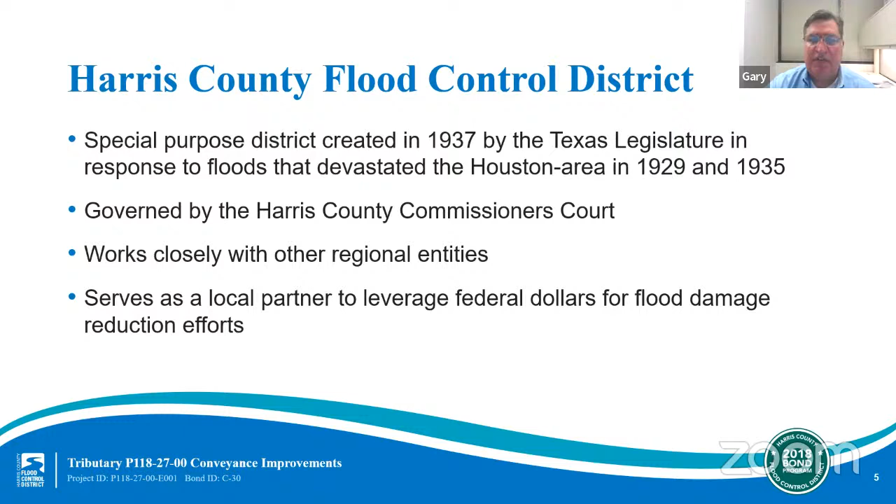The organization was created in part to serve as a local partner to leverage federal funding for flood damage reduction projects. Our mission has expanded since our founding, leading to billions of dollars in federal, state, and locally funded infrastructure improvements in the ground.

The mission of the Harris County Flood Control District is to provide flood damage reduction projects that work with appropriate regard for community and natural values. One of the most difficult challenges we face is constructing effective projects that are sensitive to community and natural values in a highly urbanized area.

Harris County includes 23 main watersheds, totaling approximately 1,800 square miles and more than 2,500 linear miles of channel. 2,500 miles is approximately the distance from New York to California. A watershed is a geographical region of land that drains to a common channel or outlet. Each watershed has its own unique characteristics and needs.

The project we are presenting tonight is in the Halls Bayou watershed located in North Harris County.

Harris County and our surrounding area is flood prone for a number of reasons. Namely, we experience extreme rainfall events, including tropical storms and hurricanes. Our area is largely made up of flat, slow draining land. And we see large concentrations of clay soils that do not soak up excess rainfall quickly.

While the Flood Control District plays a critical role in flood risk reduction, we are one of several entities involved in these efforts in our region. When rain falls on your roof, it flows through several jurisdictions, such as streets and drains, managed by the Harris County Engineering Department, a municipal utility district, or a city, such as the City of Houston, before it flows into a larger channel, creek, or bayou that the Flood Control District owns and maintains.

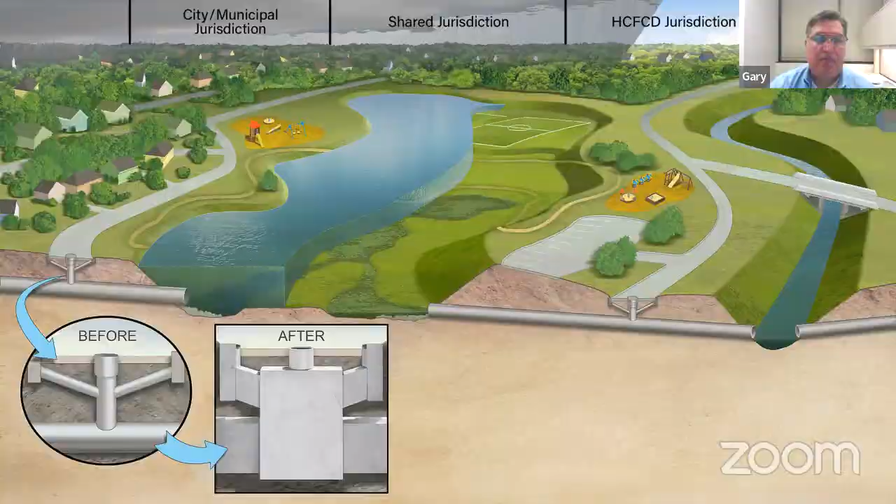On August 25th, 2018, Harris County voters approved $2.5 billion in bonds for flood risk reduction projects. This vote followed a series of 23 meetings with community members across Harris County, one per watershed, which resulted in a list of what is now 181 bond projects.

As of August 25th, 2021, every project included in the 2018 bond program has been initiated, including all of the projects in the Halls Bayou watershed.

A total of more than $1.35 billion in partnership funding has been secured so far to stretch the 2018 bond program even further. The actual timing of each individual project will depend on a variety of factors, including environmental permitting, right-of-way acquisition, and utility relocation, and in some cases, the requirements of a particular grant.

Project lists and projected schedules are updated regularly on our website.

While the bond was for $2.5 billion, the full cost of every project in the bond tables is almost $5 billion. So we made it clear from the outset that we would need funding partners to fully construct the projects in the bond program. We've had some success so far, having secured more than $1.35 billion in partner funds for projects across Harris County.

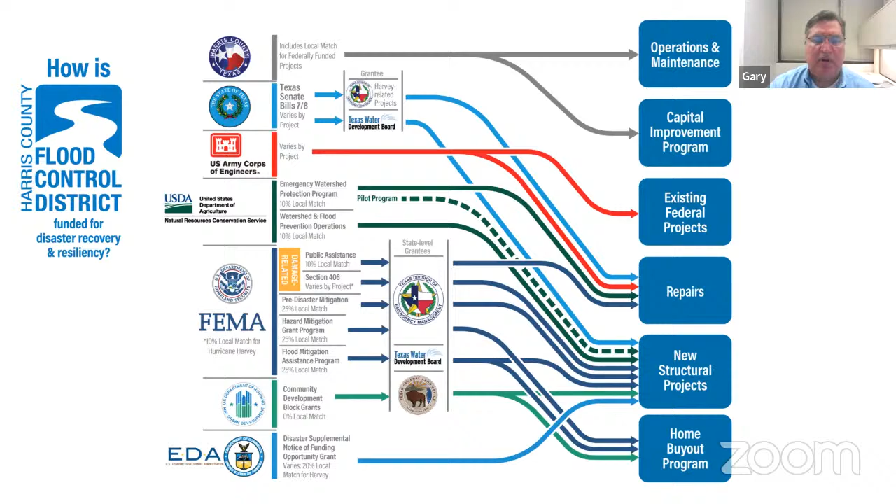We will now move into the part of the program that is specifically about the Halls Bayou watershed and the Tributary P118-27-00 Conveyance Improvements Project. As a reminder, we are looking for your input as we discuss the project in more detail. Please feel free to drop any questions or comments into the comment box or to comment via phone by pushing the star key.

Halls Bayou spans 45 square miles in north central Harris County from the intersection of Antoine Drive and Fallbrook Drive downstream through the Halls Bayou Greenway to Brock Park. While it is also its own watershed, Halls Bayou is a tributary of Greens Bayou and ultimately empties into that channel. Flooding is a persistent hazard throughout the watershed for residents, businesses, and property owners.

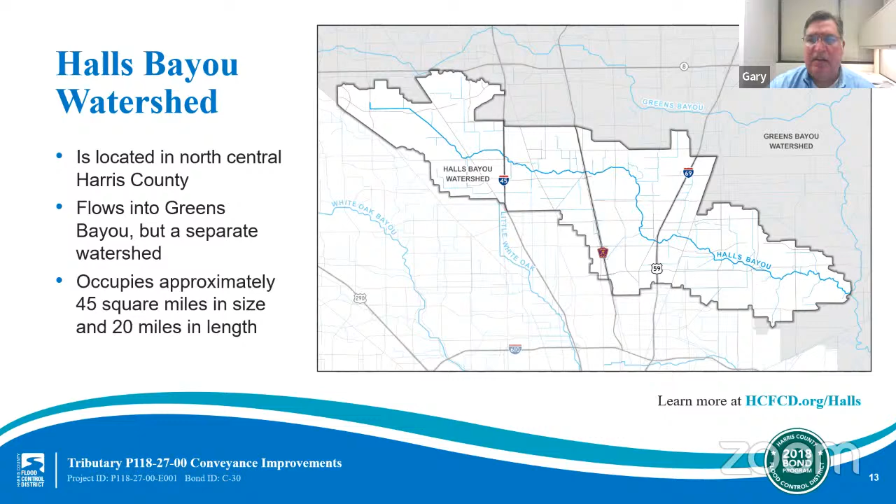Tropical Storm Allison in 2001 is still the storm of record for Halls Bayou watershed, as it flooded more than 13,000 homes. Then in 2017, Hurricane Harvey flooded an estimated 11,830 homes in the Halls Bayou watershed.

The Flood Control District is taking a watershed-wide approach to planning and flood risk reduction projects in Halls Bayou through the Halls Bayou Bond Program. There are 14 bond IDs associated with the Halls Bayou Bond Program, and each of those bond IDs includes multiple projects focused on reducing flood risks in the watershed. This watershed-wide approach provides a holistic view of activity in the watershed and enables the Flood Control District to deliver these flood risk reduction projects strategically and efficiently in a highly developed area.

Projects primarily include construction of stormwater detention basins and channel conveyance improvements on the Halls Bayou tributaries and portions of the main stem. Now we will talk a little bit about the funding for this project and others in the Halls Bayou program.

Throughout the presentation, we'll be using terms like 100-year, 10-year, etc. A 1% annual chance event is a 100-year event, meaning that there is a rainfall event that has a 1% chance of occurring in any given year. That does not mean that if you have a 1% chance event today, you are safe for another 100 years. It is simply a measure of the expected frequency based on the historical data that we have.

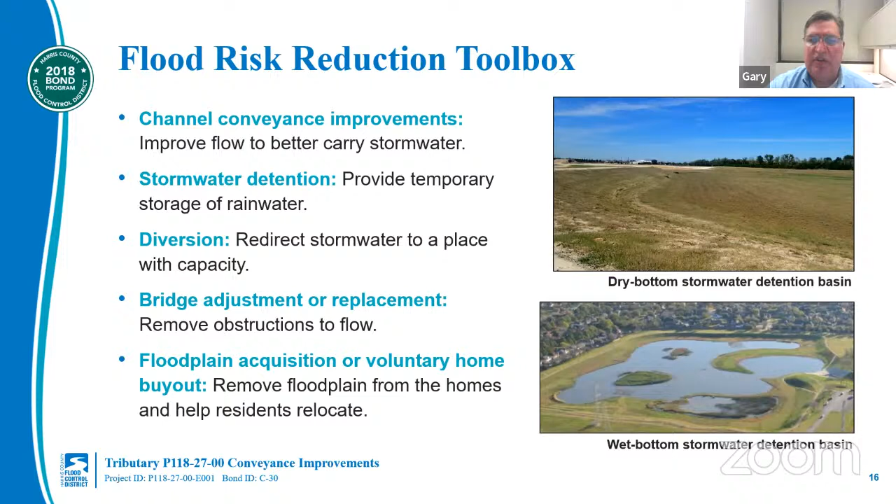Now we will get more into the specifics of the project we are discussing tonight. Tributary P118-27-00 is a channel that runs north and south and is located to the west of the intersection of Airline Drive and West Gulf Bank Road.

The downstream portion of the channel near the confluence with Halls Bayou is a grass-lined channel, while the more upstream portion of the tributary is concrete-lined, which is done occasionally to prevent erosion and other similar issues. For this project, we focused our analysis on the more upstream portion of the channel. We are considering both channel conveyance improvements and the construction of stormwater detention basins to provide flood mitigation to the surrounding area. The estimated cost of this project is $15.6 million.

I will also note that Harris County Engineering has a project to improve Gulf Bank Road, and we are working closely with them to ensure that our two projects are in sync with one another.

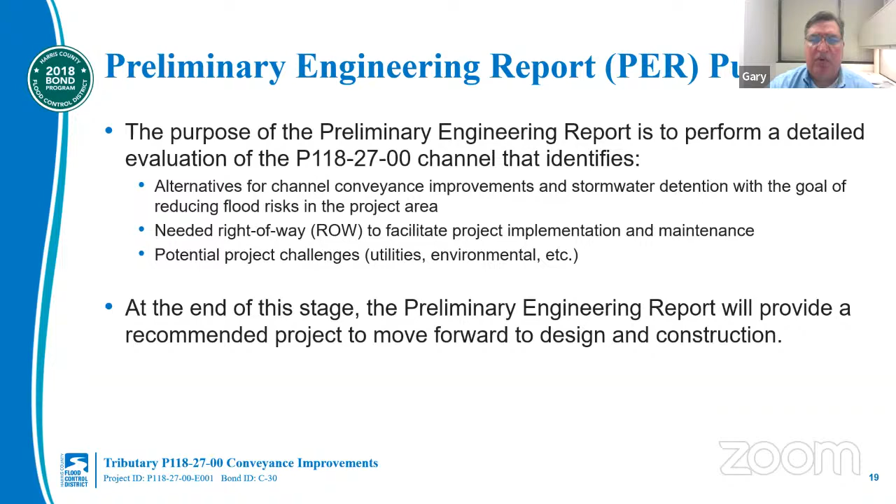The objective of the PER stage is to perform a detailed analysis of potential channel conveyance and stormwater detention alternatives within the project area, to identify right-of-way necessary to facilitate project implementation and maintenance, and finally, to identify and minimize project constraints such as utility relocations and environmental impacts. At the end of this stage, a preliminary engineering report, or PER, will be prepared that provides a recommendation that will move into design and construction.

Parts of the P118-27-00 drainage area are in the 500-year floodplain, or the area that has a 0.2% chance of flooding any given year, and closer to Halls Bayou is in the 100-year floodplain, or the area that has a 1% chance of flooding any given year.

We will now look at both of the flood mitigation tools that we are considering for this particular project. Unfortunately, tonight, we are not able to share exact details on the alternatives that our project team is considering because we still need to acquire the necessary right-of-way in the project area.

The first flood risk reduction tool that I want to discuss is utilizing channel modifications within a watershed. Channel modifications increase the size of the channel so that it can carry more stormwater, or in other words, increase the system capacity. There are different ways to increase a channel's conveyance capacity, which include widening and or deepening the channel, reducing the friction by removing heavily vegetated areas, or occasionally by adding concrete lining.

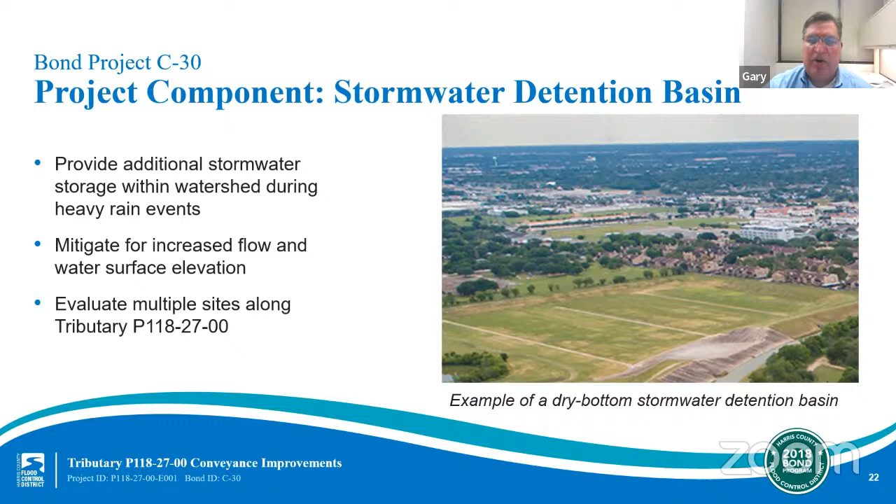A stormwater detention basin is built to store excess stormwater until it can make its way safely back into the channel and then ultimately out to Galveston Bay. There are several ways for stormwater to fill a detention basin, but it's important to note that all of our structures are passive designs that utilize gravity to operate them, so no mechanical gates or pumps are needed.

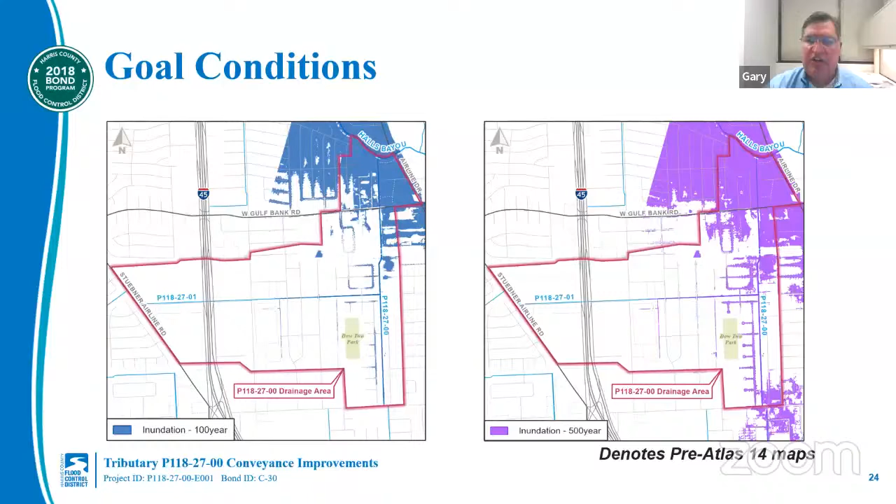These maps show the goal conditions once the project is constructed. As you can see, there is a reduction in the inundation area in both the 100-year and 500-year level storm events compared to the existing conditions map that we showed a couple of slides ago. This project will allow stormwater to convey quicker out of the drainage area, which solves the main flood issue in the area.

By implementing these proposed flood risk reduction strategies, this project will provide the following benefits during a 1% annual chance event, or a 100-year rain event. The project removes inundation from up to 296 structures, removes inundation from up to 84 acres of land, and removes inundation from approximately 2.8 miles of roadway.

These benefit numbers are based on models that use pre-Atlas 14 data. The numbers may change when the Flood Control District releases new models based on the Atlas 14 data. In addition, this project will reduce the flow of stormwater entering the Halls Bayou main stem during rain events, helping to reduce flood risks downstream.

The last thing I'd like to touch on is the next steps, specifically where we go from here. We are currently in the preliminary engineering stage and finalizing the PER. In the near term, the PER will be completed and approved by Harris County Commissioners Court. We anticipate the PER will be completed this fall. Upon completion, our team will begin initiating the required right-of-way acquisition.

Once these activities are initiated, the Flood Control District will host an early design community engagement meeting to share details of the proposed project. The final design stage includes development of detailed construction drawings and specifications used to construct this project. We currently anticipate the design stage to be completed in the fall of 2023.

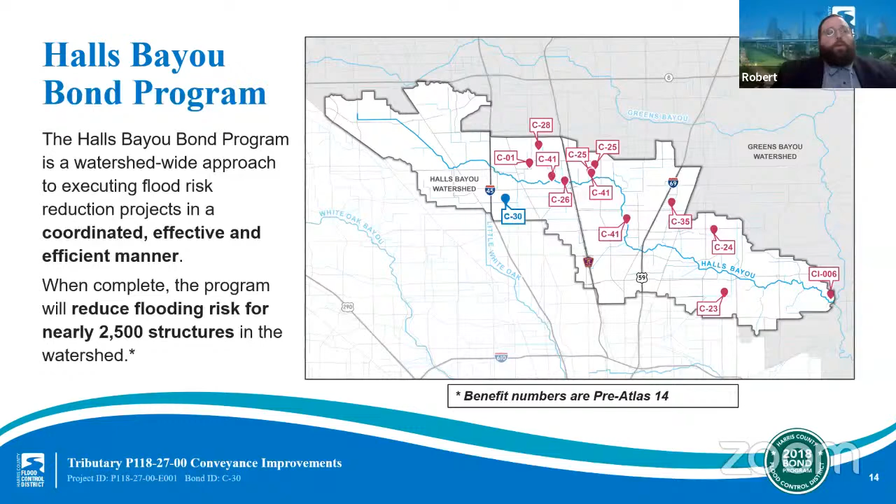All right, our next question for this evening is for Gary. Shirley asked, will this project reduce future mandatory buyouts in this area? And also, she would like to know how the flood control district communicates with residents about its buyout program.

Robert, I'm going to answer the first one first, and then if I forget to get to the second part of it, can you remind me? Absolutely. In order to understand the question about future mandatory buyouts, I just want to give a little background about what the difference is between what we call a buyout and right-of-way acquisition. So a separate program from the bond project that we're talking about today, the Flood Control District has what we call a voluntary buyout program.

That program has a very specific reason that we do it. The voluntary program is typically a partnership that we have with FEMA, and we have identified throughout the county pockets of homes, areas where the cost to reduce the flooding for those homes, where the flooding is so frequent and severe, that we really cannot come up with a capital project, a channel improvement or a detention basin that is realistically going to be able to reduce the area that floods.

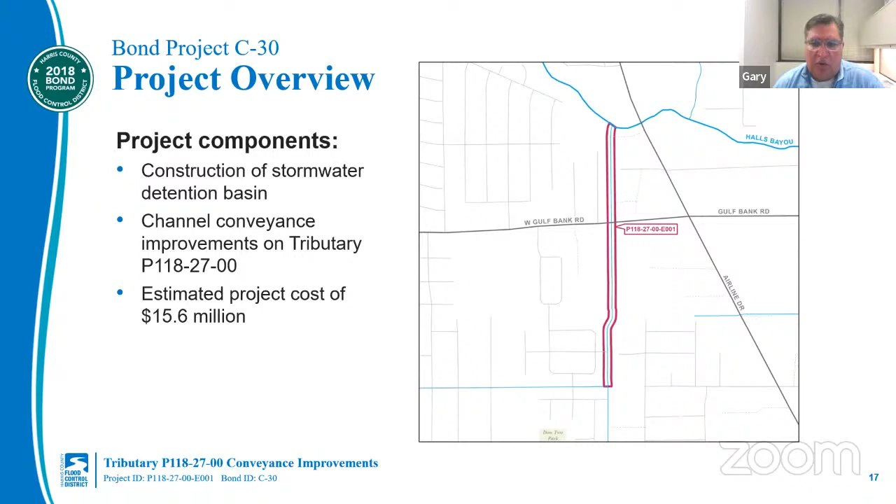The second way an area floods is as water makes its way to the bayou wherever this area is. If that bayou is not large enough to accommodate all the water coming, you'll start to see what we call floodplains, where water spills out of the channels and you get areas of inundation. So this particular area, the main focus of the project is trying to increase the capacity of the P118-27 channel, to accommodate more water when it gets to the channel, so there's more capacity for that water to move through the system.

As we touched on in the presentation, that goes hand in hand with building detention so that we don't increase flood risks elsewhere. But this area is also at risk of flooding when you get large events of 5, 6, 7 inches in a 1, 2, 3 hour period. Those are the type of events where you'll see them taxing the local drainage network, which includes storm drains, roadside ditches, and all the systems designed to get water to the bayous. So the project is really focusing on the P118-27 channel, but why this area floods is a little broader than that, and there are other reasons.

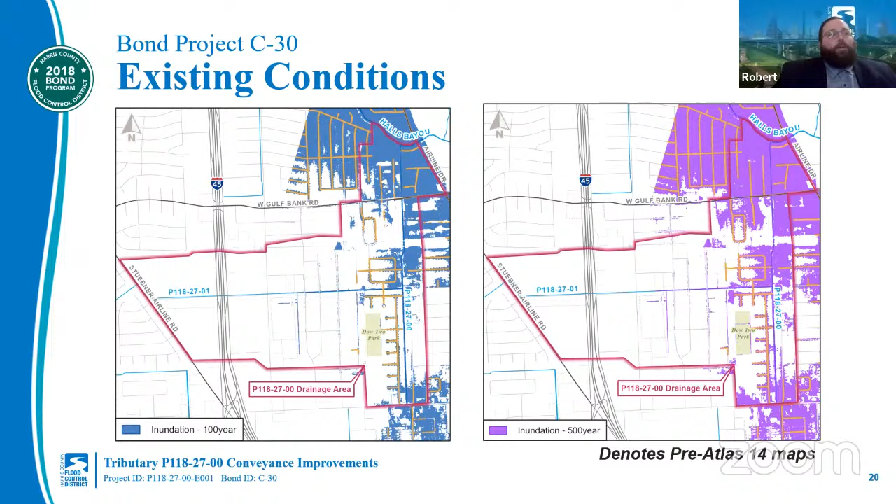Thank you, Gary. Our next question is for Dora, and this is similar to Colleen's question from earlier. Are there any homes in the right-of-way of this project? For the channel conveyance improvements, we are looking at doing some widening, and we are trying to avoid structures for the channel widening. For the storm detention, we are still looking at different options. But as far as the channel widening, there are not homes in that portion of the right-of-way.

Thank you, Dora. Our next question for the evening is for Gary. Trudy wants to know how she can tell if her property is one of the benefited properties for this project. Probably the best thing for a very specific address, specifically for you Trudy, would be if you want to reach out and give us your name and address, we can provide you more detail back.

For the purposes of today's meeting, we're really looking at the watershed at a higher level. But as we develop our simulations, computer models, and engineering study, we have very detailed information about the floodplain and how deep it would be and all that type of stuff. It's just very difficult to share at a high level with every resident. So those type of questions would be best addressed if you're okay to just send us a comment with your name and address, and say you'd like to know specific to your more immediate neighborhood or address how this project will impact you. And we can follow up after this meeting.

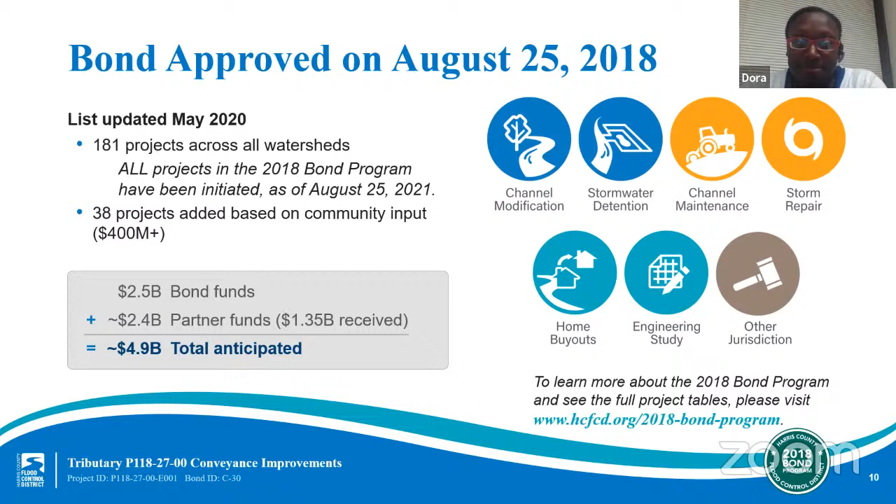Thank you, Dora. Our next question of the evening is for Gary. Gary, if you are improving flooding in this area, are you just flooding another area as a result?

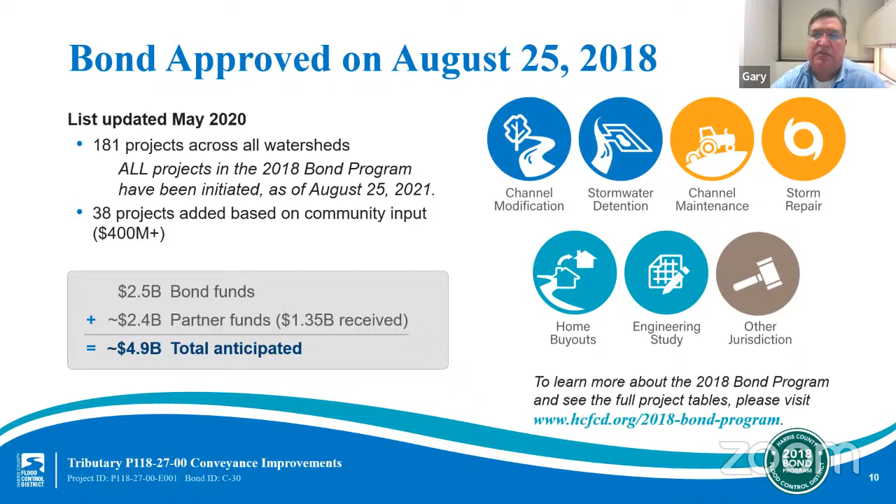Yeah, that's a great question. The Flood Control District is what we call a no adverse impact agency, meaning we cannot and do not simply transfer flooding risk from one area to another. We talked about this a bit in the presentation, and specifically why we have to build stormwater detention basins: whenever we do a conveyance improvement project—widen, deepen, or concrete line a channel—that allows the channel to convey more flow. Unless we improve it all the way down to the bay, at some point our projects can create an impact, so we do the detention.

Our project engineers who work on our PER studies, our feasibility studies, must ensure that flood risk reduction efforts such as channel conveyance improvements and other work will not increase flooding anywhere else. They do this by analyzing within their models where impacts might occur, then putting in stormwater detention basins to make sure there is no adverse impact.

Thank you, Gary. Our next question is also for you. Gary, how might this proposed project impact property values in the area?

The Flood Control District cannot really predict how property values will change as a result of any potential project. However, we know that properties with a lower risk of flooding generally have a higher value than properties with a high risk of flooding.

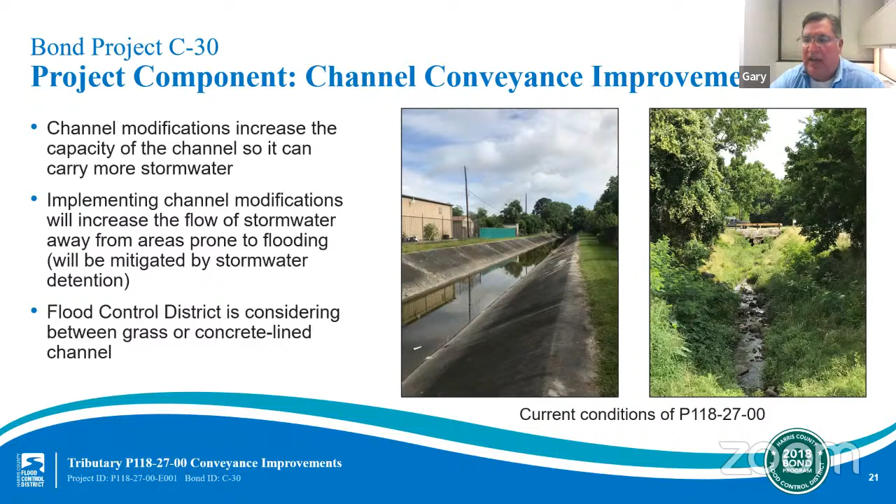The intent of this project is to increase channel conveyance and add stormwater detention, thereby reducing the risk of flooding for a lot of structures in this watershed. As flood risk lowers and homes have less risk of flooding and don't have the historical flooding, property values generally would increase. But it's hard for us to predict specifically where and how—generally that's the trend.

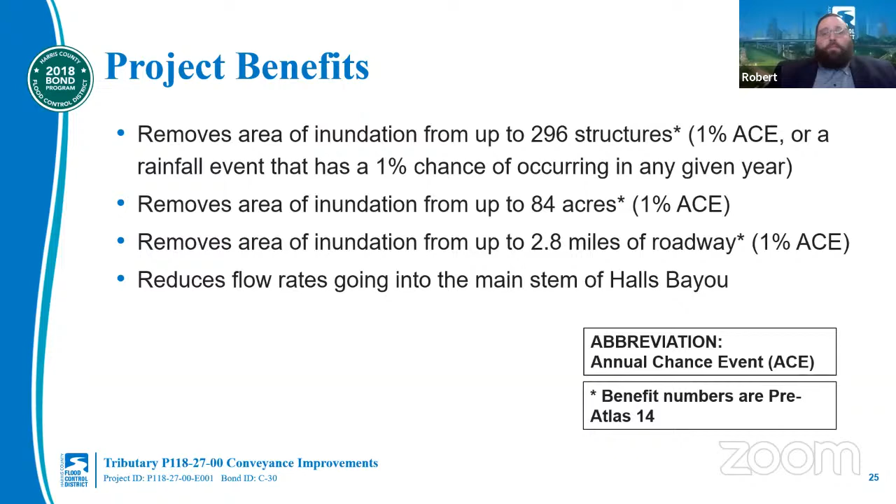Thank you, Gary. I would like to remind everybody that you can provide public input for this project by visiting hcfcd.org/C30.

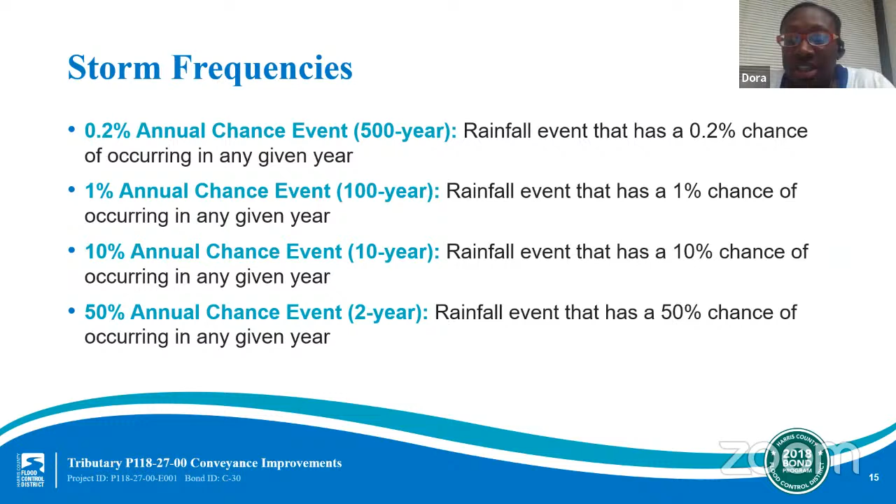Thank you, Dora. Our next question of the evening is for Gary. Gary, can you all stop the new development going on across the street from my neighborhood?

That's a great question. In general, the Harris County Flood Control District is not a permit authority and not a floodplain administrator. What that means is our role in development is to make sure development doesn't put more water into the bayous we have authority over. All new development within Harris County must comply with strict requirements for stormwater detention, and development criteria have been in place for 30 years, always required for any development in the county. These criteria require new development to mitigate for flooding and drainage impacts caused by the development. As part of the review process, we make sure development is not increasing flows into the bayou network.

But the specific question is, can we stop it? If somebody shows us they're putting more water into the bayou and creating an impact, that development would never get permitted. But again, we're not a permit authority. All we can do is provide comments back to the permit authority saying either this is a problem, or yes, they're in compliance with the criteria that ensures no downstream impacts.